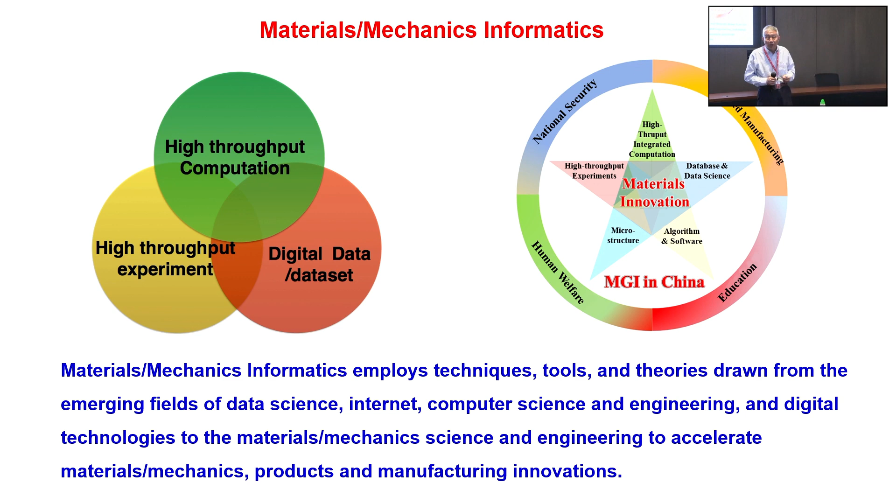Okay, but I strongly suggest you learn a new tool. It's just a tool, keep that in mind. The new tool is AI, machine learning. I urge you all to equip yourself with a new tool, AI, machine learning. So I put there: strengthen domain knowledge, no matter what you are doing. Strengthening your domain knowledge and taking a new tool will make you succeed. You have to do that.

So just recently, this year, we have ChatGPT. Everybody knows ChatGPT. But I changed the chat, and I'm not focused on natural language processing. I focus on materials. Materials people focus on materials, mechanics people talk about mechanics. To Guohua, I emphasize battery. So I have some students utilizing AI to do battery research. But I like those three letters, GPT.

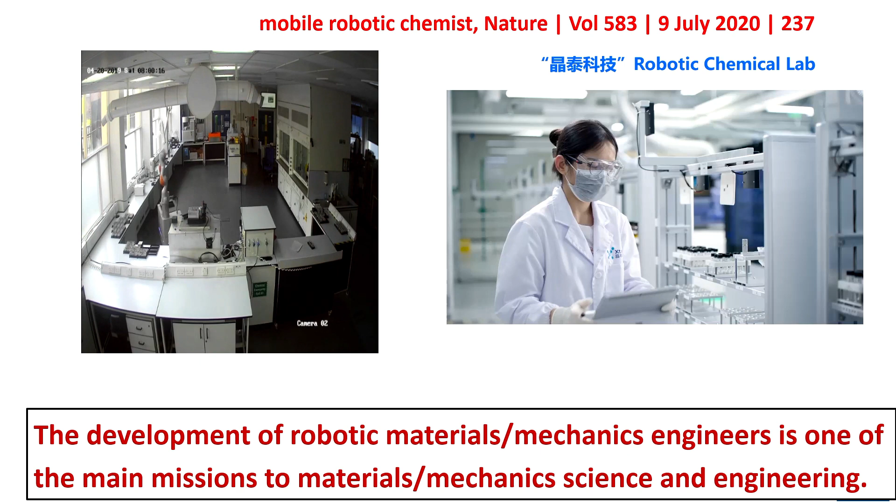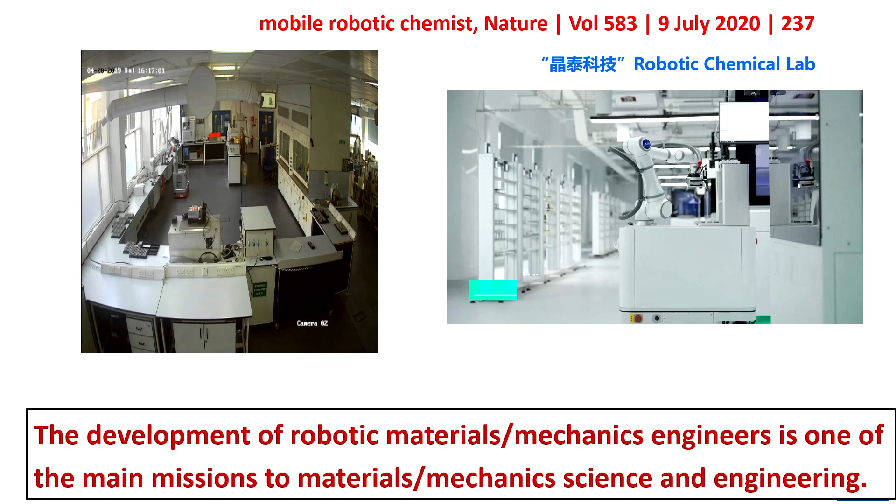Now, I'll give you an example. The first paper was published in 2020 in Nature. They call it a mobile robotic chemist. After I read that, I tried to build the same kind of lab. It may not be for chemistry, maybe for metals, for high entropy alloys, doesn't matter. Maybe for heterogeneous alloys, maybe for battery. For that, I need some money. So now I'll try.

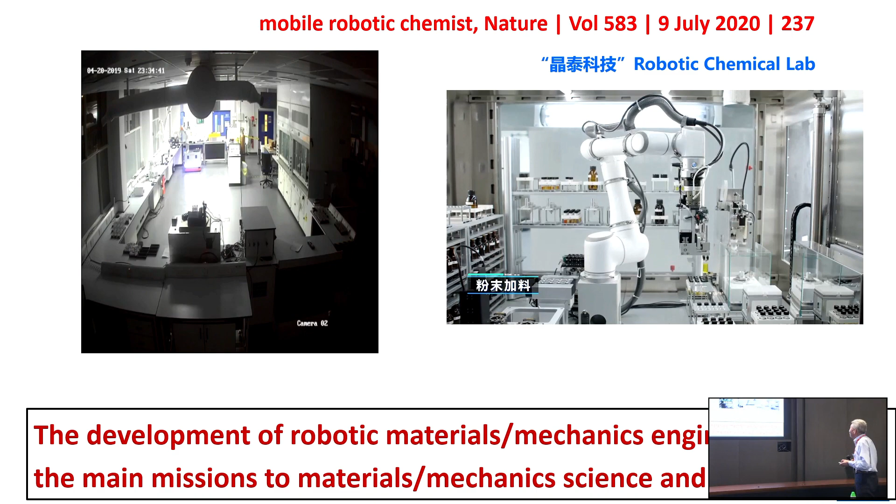It's hard to realize my dream to get this AI lab. So what can I do? I helped found Hong Kong UST Guangzhou. I joined them because the leaders, president, vice president, are all my former colleagues. They said, "Oh, Tongyi, you have to come back to support this new university." So I agreed. Now I have to take care of Shanghai University and also Hong Kong UST Guangzhou.

Now, a new university has an advantage. They have money, they have lab space. So I organized a lot of young assistant professors to work together. They have their own different backgrounds. We are the first group, as one example. The material we use is for solar cells. We want to develop this AI lab from materials design to solar cell device, the entire thing. We're still working very, very hard.

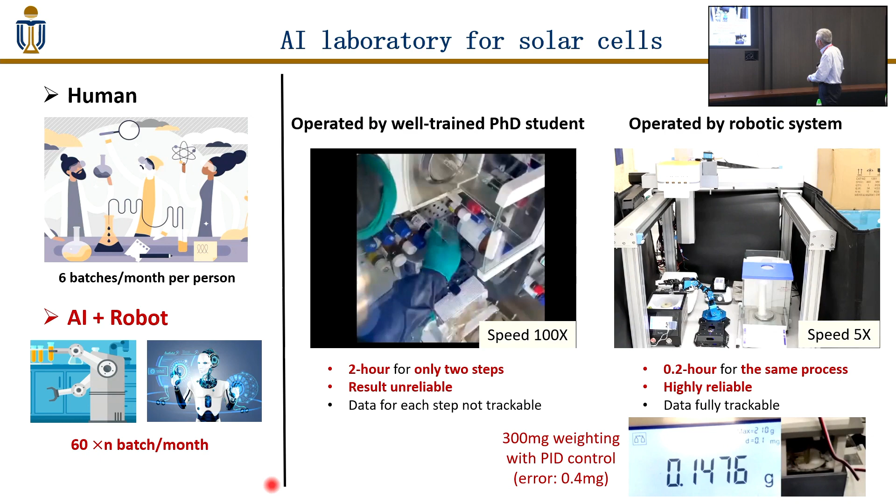We usually say these are initial, very, very initial results. We operate with a robotic system. Now we are still improving, still working on it. Now, I just added this PPT for you. So let's talk about metals.

Now you have materials. You can determine the materials by composition, then fabricate them. This involves thermal treatment, the heat treatment. You have a preliminary solution, then you do an aging treatment. At a high temperature, you try to get them into a single phase, homogenize them. Then you cool it down, then heat them to a low temperature, and precipitation occurs, forming nanoparticles. Their size, geometry, and configuration play a very, very important role in the mechanical properties of materials.

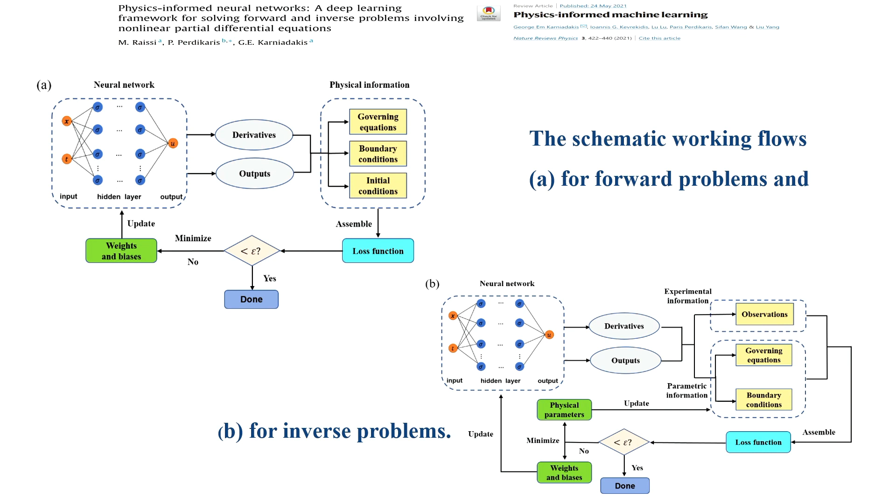How to do that? Through PINN. So now I'm writing the second book, still working on it. I asked my student to plot that. They have one we call the forward problem.

Here you solve your partial differential equation. You don't use VASP or other molecular dynamic simulation or your fundamental methods. What you use is a neural network to solve it. Then you put those governing equations, boundary conditions, initial conditions as a loss function. Everything you put as a loss function. Then you check, put a criteria there to say whether you are satisfied with this loss. If you are satisfied, then this neural network is your solution of those partial differential equations.

The partial differential equation may not be only one. It could be a couple, or they are coupled, a set of partial differential equations, as we use in phase field simulation.

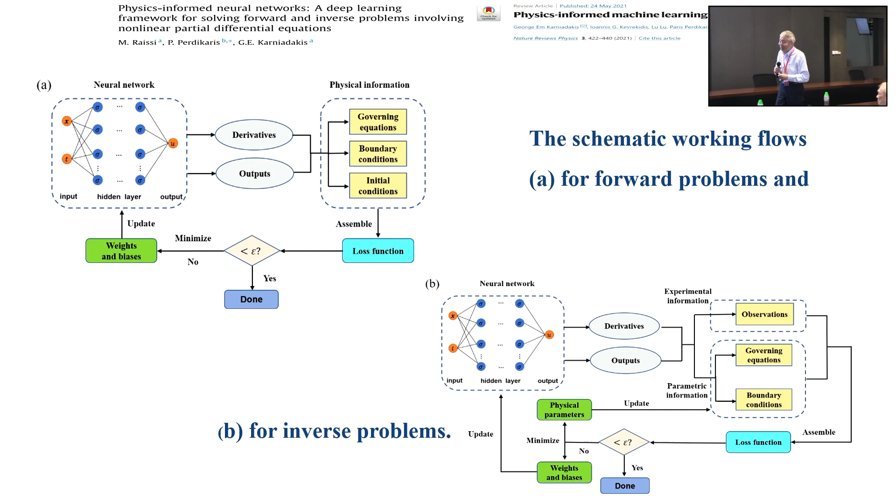In the materials community, I said it's better to do active learning. Active learning is actually what we call adaptive material mechanics innovation, I call it that. So you have to use your domain knowledge. I put the domain knowledge as a harbor.

No matter if your data could be purely computational data or experimental data, I personally like experimental data more. I prefer experimental data. So you have your data. From that initial data, you build up what I call a database. Some call it so big they call it a data set. That's more relevant. Then you analyze the data.

We do data pre-processing, then we develop a machine learning model, then we evaluate our model. Then based on this model, I use Bayesian global optimization to determine what's the next experiment I should do, what is the next computation I should do, in order to reach my goal.

The reason is all those models have some uncertainty. Experiments have uncertainty, computation also has uncertainty. That uncertainty is in AI too. If you are a student, your supervisor will ask you to repeat your experiment to get your error bar. You cannot just do it once and call that the result. You have to repeat it.

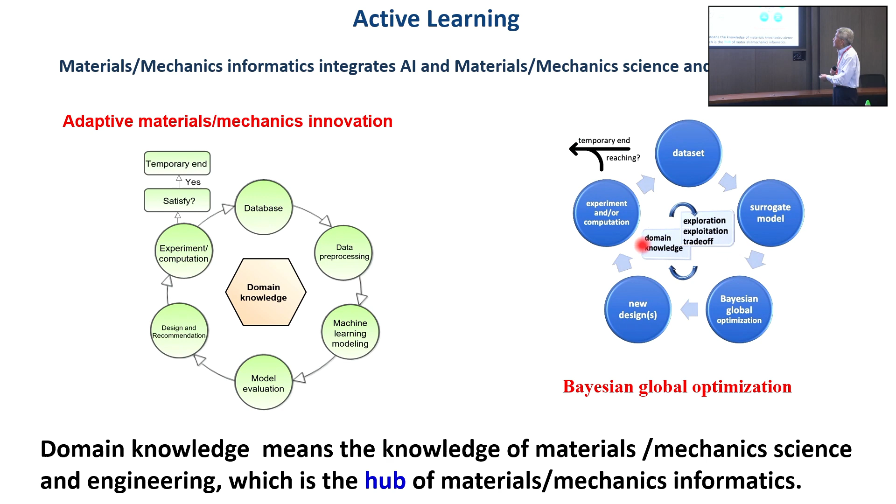So in this paper, we develop a method to correct the noise in STEM. How do you convince the reader? How do they know your correction is correct?

Okay, I can do that. I do simulation. The reason is the truth comes from experiment. You really don't know where the truth is. You just try your best.

In simulation, if I don't put noise there, I assume the simulation result is the ground truth. Then I put noise there on purpose, I make the noise very big. Then I use the method to correct, to go back. Through this, we are trying to convince the reader that the method we proposed works.

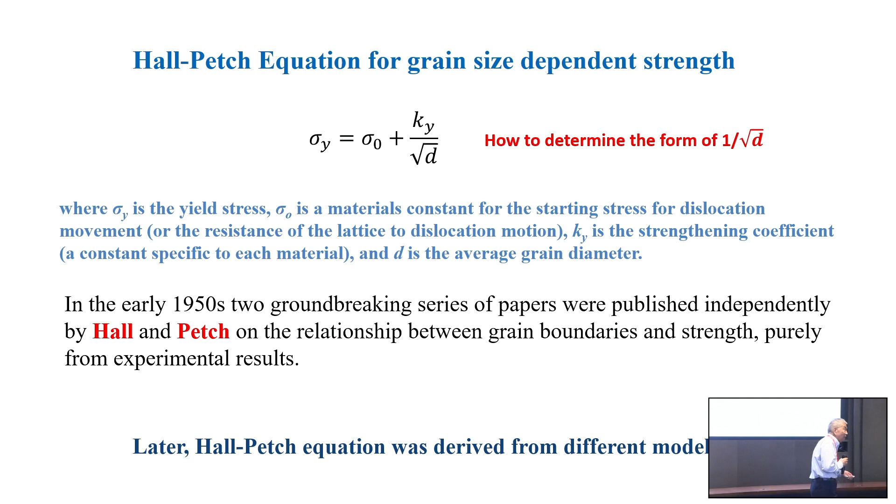Now, the Hall-Petch equation is obtained from data. Later on, last century, we developed dislocation theory. So based on dislocation theory, we can derive, build up some model, then derive the Hall-Petch equation. Very interesting, not only one theoretical model, you can use different theoretical models to get the same equation. That's just to emphasize how important data is.

Now, I strongly suggest we combine both, knowledge-based and data-driven, put them together to find a formula, to discover equations. I want to make a balance, not just data-driven, but also expert knowledge. I think Ken just mentioned you found a very important equation, we want to learn more about your equation, that's an expert getting that equation. So we want to combine them.

So now, just very briefly talk about machine learning. The error analysis in machine learning: error can basically be separated into intrinsic error, bias, and variance. So the philosophy is somehow different.

In my whole life, when I derive an equation, I always trust that my equation is correct. Because in some sense, I said, okay, if an experiment doesn't fit my equation, something must be wrong with your experiment. In data-driven approaches, it's not like that. They say you cannot find the true equation, the true function, you can only find an approximate function or equation. There are so many approximate functions.

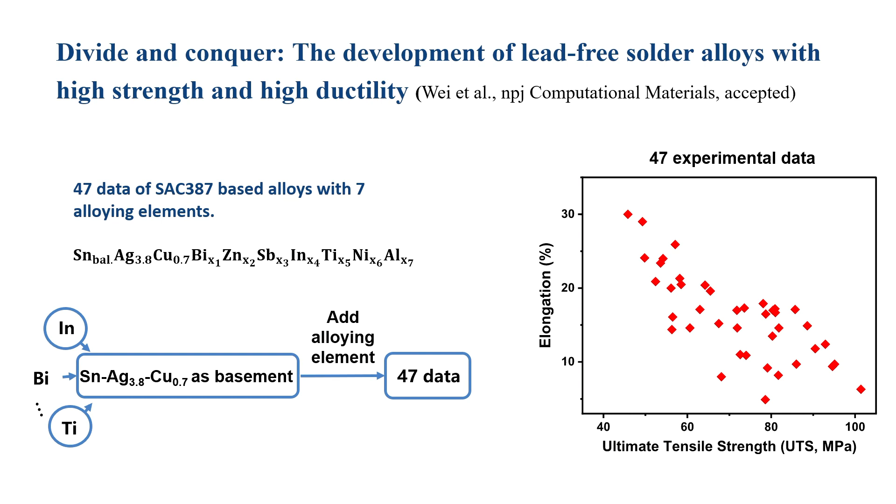Now this is a new work, just accepted, probably online today or tomorrow. So what are we doing? Handling small data. How many data? 47 is very small. Even with 47, the dimension is very high, even though it's only composition. Think about the composition here: I have 7 available alloy elements. This one, the silver, I fix it. Copper fixed. I still have several.

So now from there, we want to get high strength and high elongation. Can we develop some new lead-free solder? That is it. Kian, you are the expert. This one is a bigger project because we're working with Yunnan Tin; it's supported by Yunnan Tin.

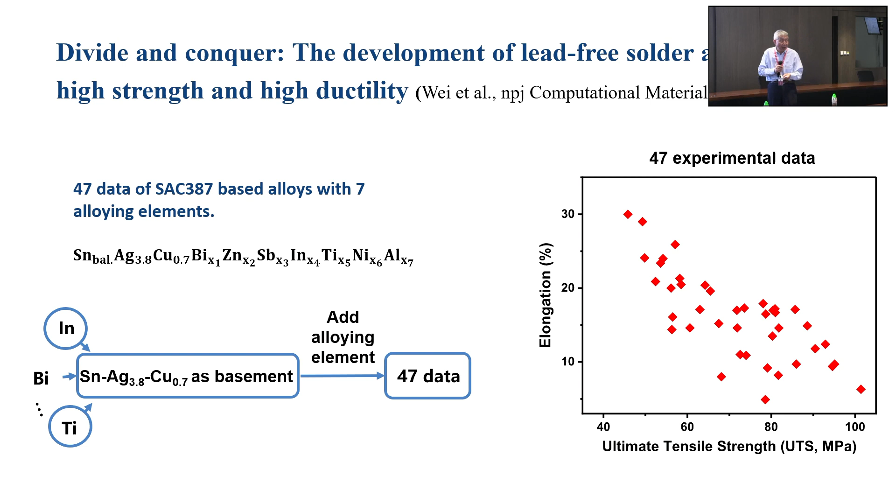Now I developed a new software, a new algorithm. I basically modified some available one. I gave it a name: a tree classifier for Gaussian process regression. So we get this, then use this one to separate the data into 3 even smaller subsets. The original is 47; now it's even smaller, only a few.

Now what's the advantage? Originally your search space is larger. After I separate those, each search space becomes smaller. Then I can develop a very good model. Then use my domain knowledge: you have ultimate tensile strength and elongation, and multiply them together. Then 2 objectives become 1, a single-objective search. And this Y approximately stands for the mechanical work per unit volume absorbed by your tested sample. It has physical meaning; keep that in mind.

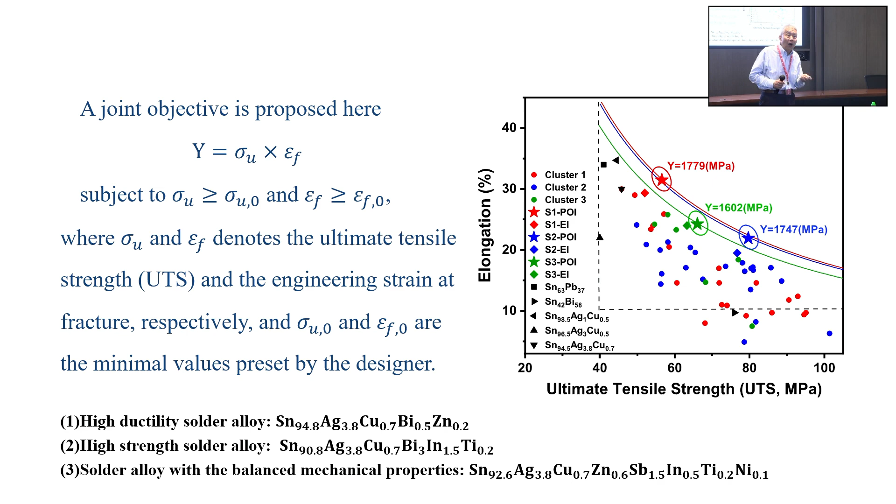So each time we repeat, we can find a new prediction. We use the 3 subsets, and in each we get a new one. As I mentioned, we use Bayesian global optimization, which has different algorithms. I use 2 algorithms, and for each I asked a student to repeat a couple of times. Now I can get error bars. Then I found 3 new alloys, lead-free. Now we do active learning. This is initial work; now we get much better.

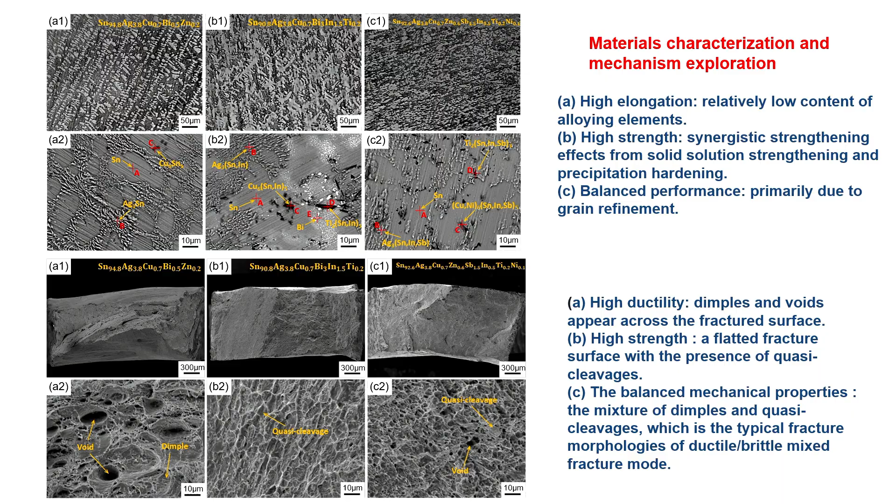Of course, materials people always do characterization to explain the mechanism, why it's caused, and make a story. How to make a story is not today's focus. I can make a story also, but my purpose is to get something new we can put on the market.

So now talk about small data. I separate small data into 2 parts. One I call unreliable, and one reliable. For reliable data, we have a lot of methods. We can do data augmentation. We can do transfer learning.

Actually, PINN for inverse problems is basically transfer learning. Okay, you have to understand that. It's basic. Now, if they are unreliable, what's going on? If they are unreliable, in my personal view, use your domain knowledge. Use your domain knowledge.

So use the domain knowledge. I first gave a presentation about this work a few years ago in Singapore, when we celebrated 100 years of fracture mechanics or so. Professor Bažant was there, so that's why I use his data. This data has different sample sizes. The big one is this big, this is a small one. There are 4 different sample sizes.

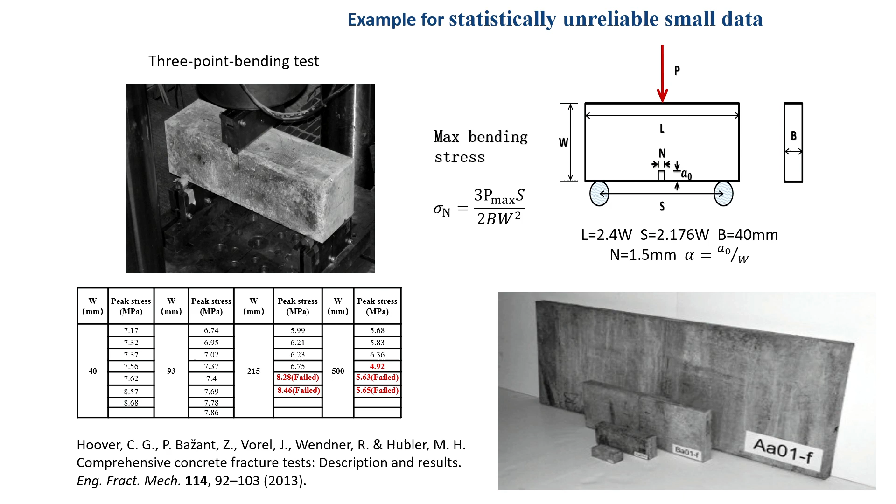In addition, they have notch lengths, the depth of the notch, which are also different. So you have a sample size dependent phenomenon and also a notch length dependent phenomenon. I analyzed their data and found that their data are not reliable. When I gave this talk, Professor Bažant was not very happy. Anyway, his is the largest data set published in the literature. More groups do similar research, but their data size is even smaller than his.

Now, what can I do? I use two pieces of common domain knowledge everybody can accept. One: the probability of a bigger defect existing in a large sample should be higher than in a small sample. Everybody accepts that. Another: the deeper the pre-notch, the higher the stress concentration at the notch tip than a shallow pre-notch. Nobody argues with this.

Based on this, I put forward 4 hypotheses, and based on the 4 hypotheses, a size-dependent normal distribution. In Singapore, in my talk, I used the Weibull distribution. Later on, I said Weibull may not be good for 3-point bending, so I changed it to normal. Then for the size and the pre-notch, I put another normal distribution model.

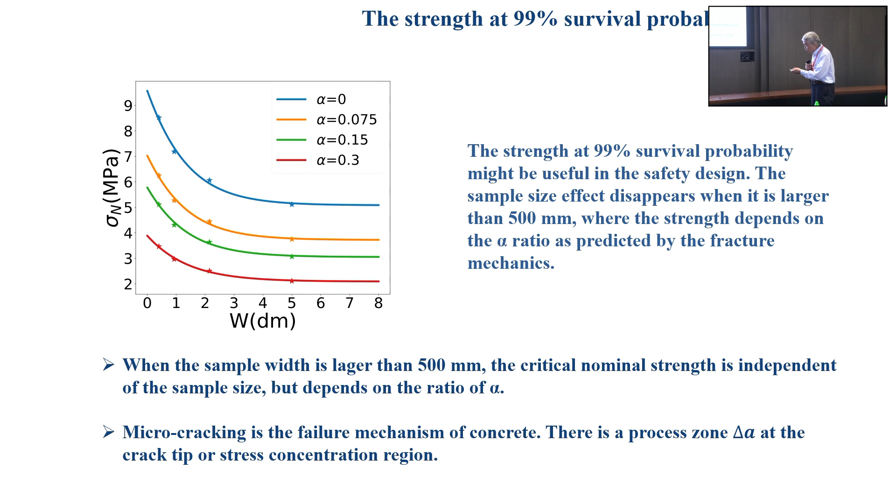Once it depends on this, fracture mechanics comes in. I can calculate the stress intensity factor. Then I put in what they call the fracture process zone. In metal, we call it the plastic deformation zone in front of the crack tip. Once we put it there, we can get K1C and also the fracture process zone size. Those two values we can find in the literature. Everybody accepts that.

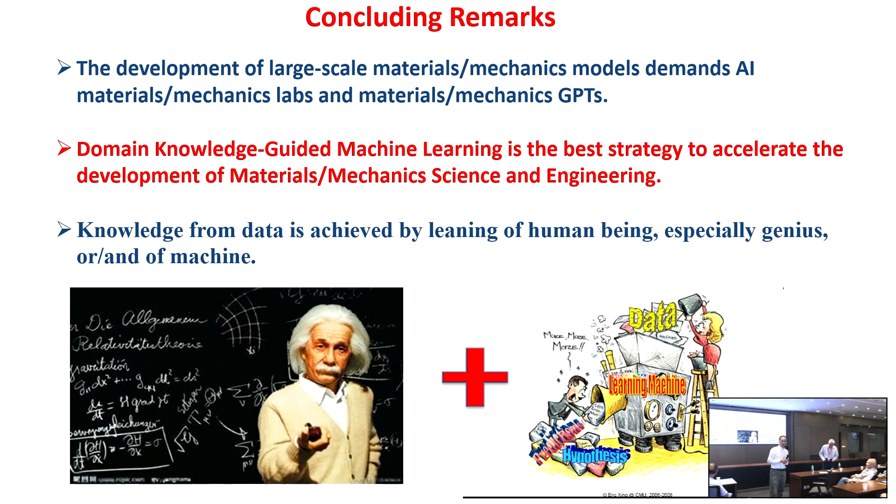Thank you for this insightful presentation. To run a reliable machine learning tool, we need to consider both successful and failed data. But today, most journals only publish successful data. So how to deal with the scarce availability of failed data? A very good question.

In a former presentation, I had a slide about failure data. In materials processing, we want to find at which processing conditions you can make your sample. So you want to find the boundary between successful and failed ones, correct? To find the right boundary, you need failed data.

That is actually one Nature paper, okay? Very, very important. Without those failed data, you cannot find the boundary. From a data science point of view, there's no success and failure, okay? But your data must be reliable. If you get unreliable data, you repeat that, you cannot repeat it, then that's a problem.